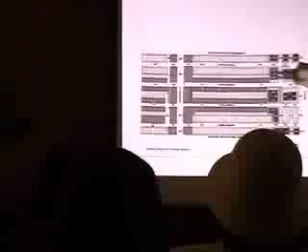We have the darker gray, you can't see it very well. So this is where we would have most of our height. This zone would be that transition of height. So we're talking 16 stories ideally, the ability to go to 20 stories in the black areas, 85 feet here, 55 feet along the corridors, and then 45 feet in the residential area.

I should add that it's very doubtful in my mind that anyone's ever going to build a 55-foot building on 30th Avenue.

Excuse me, is there like a 100 feet setback around the area, lot 2021? This is 100 feet setback above 45 feet. And he'll show you some visuals why that's important, because it allows you, when you walk down by the buildings, to basically have a setback, and then you stair step up for the height. So it helps you with the visual corridor.

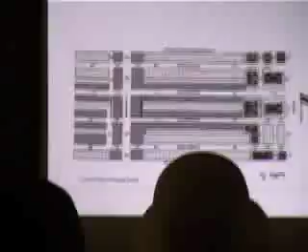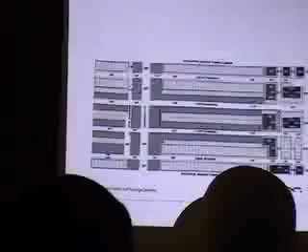It goes back to the small scale character that we promote. You see here, these numbers are kind of the general setbacks at ground, at the street level. The black numbers, and then the white numbers up here are the setbacks that happen above a 45-foot plane. And that goes to creating an articulation in the building that allows the pedestrian to perceive it as a fairly small-scale environment, for the towers and the higher buildings to be set back from that realm. And it protects the view corridors and the character here. That's what those setbacks are about. I'll go into those in more detail.

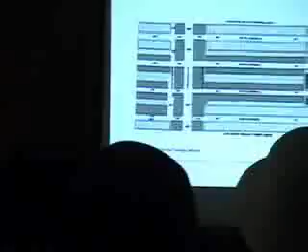It's hard to read the color. On the property in the waterfront, the next block down from where you are, here this is 45. 45. In that particular area, is that 45 feet above where they'll let you go from the flood elevation? So it's 45 feet above where you can start. That's defined as 0 being base flood elevation, not necessarily where the ground is, because we all need to work from the same baseline.

Well, I have some concerns about that 100 feet setback. Two-level house, it's a big house. You could get a 4-story multifamily residential building in that as well. One of the things, are you dealing with occupied space, you think, when you do that?

If you're asking what the height is measured to, typically it's measured to the roof, which means you can have a parapet that encroaches that height, or if you have a gable or a hip roof, it's measured to an average of that. It's not that you can't have some element that encroaches that height, but it keeps within the definitions of the zoning code.

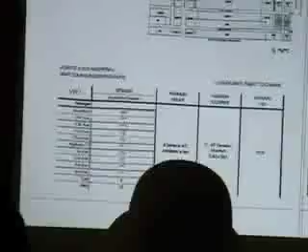And then the maximum height, in this case, 4 stories or 45 feet, and then a maximum footprint, which is 0.6 of gross lot area. FAR, the only place we're proposing to use the FAR is the waterfront 2 district, because FAR becomes a really important measure when you're dealing with a high development capacity. If you're dealing with buildings that are 5 stories or less, you can generally handle the massing and the capacity of those buildings just by controlling the setbacks, and FAR is less of an issue. But in the higher density, the FAR gives you flexibility in terms of where you can place things.